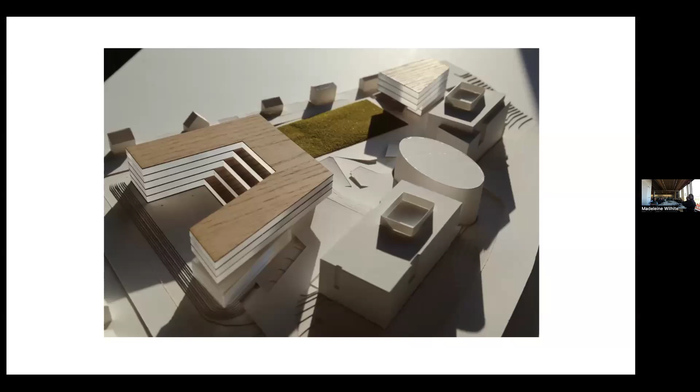At a high level, one of the fundamental goals was to reimagine how you enter the campus. For those who visited the Adidas store when it was located here, it was essentially a parking lot—you'd come in and there was a mismatch with a roundabout that was a dead end. They wanted to say, this is a global brand, and the experience of the campus should equate with the prominence of the company.

Just some history: there was a competition where they pre-selected about 6 firms, and we did a very quick model that went off to Germany and never came back—it broke into a million pieces.

It's interesting to see the initial ideas that really formed the building. We broke the program apart—for an office building we had this central pitch which we reconfigured, and then another idea of a cafe and a performance zone, which is a state-of-the-art gym. This wasn't necessarily totally in the brief, but we had food, service, and cafes in both areas that were a little different, with a landscape connecting it all.

One key thing was making sure the building reflected the ethos of the organization. Adidas has been involved with the Ocean Plastics Parley project, taking fishing nets and plastics from the ocean and using them in their footwear. The turf field outside has hundreds of thousands of recycled bottles in it. We wanted the building to reflect that engagement with sustainability relative to clothing and shoe production. Adidas as a brand also has a legacy of reinventing historic shoes with different materials and subtle variations, which we wanted to explore too.

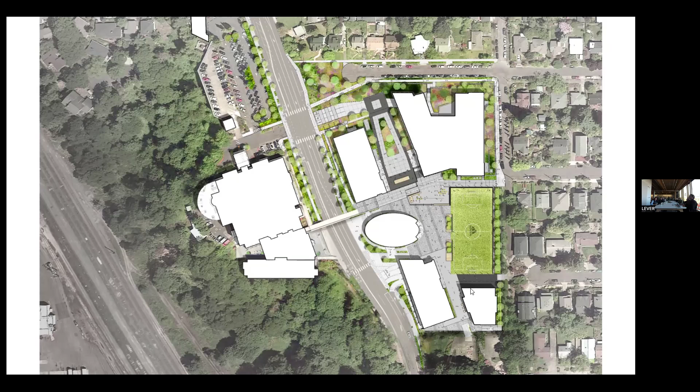And then this new plaza, the heart of the campus with the pitch, as they say in Britain, and then the back end here of the performance zone, which was originally tennis courts sitting on top of the existing parking garage. But the idea of sport being central was a key part of it, with this central plaza also being a place where people would work.

These show how the landscape navigates this somewhat unusual situation. I think this building was done by Bora in the 90s or something, and it was a renovation. Then we have single-story houses, and then our building. So it was quite a thing to thread all these elements around.

So this is some of the landscape components, in the sense of the connection of the interior to the outside, and the landscape becomes a major element within the project because we're trying to soften the edge as it comes to the neighborhood. And this is where the buses come up now, so it's a whole new entry sequence into the building.

So GGN really worked on this, creating this really beautiful buffer zone with these buildings, which are quite large, but we think actually strengthens the urban character of the landscape and the connection to it. So you can see here the building in the distance.

So I'm starting to talk a little bit about the gold building, which is the larger of the two. You can see here, this was an existing parking garage that is actually connected all the way to the major street that fronts the campus, and that's where you have access into this parking garage.

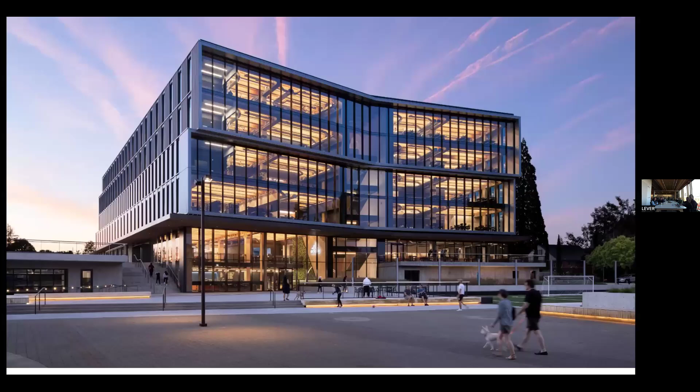Which is pretty fast, and one of the ways we did that was to look at prefabricating as many of the elements as possible, leveraging the fact that we're doing a parking garage, which will probably be concrete below grade, using prefabricated precast elements, and then extending that to create this hybrid building at the top. I'll show you in more detail how that works.

This gives you more of a sense, and Chris will talk about it in more detail, of this entry sequence where they would have whatever UCLA come up, unload the bus, and have this entry sequence. There's a bronze statue right there that you can see of Adi Dassler, the founder, so you can get your picture taken with that.

And then this is the sort of trick of this, it's still a very large parking garage, and it's also their loading dock. The idea was really to create a system that could work with a precast plank below grade with the parking, and then we created this perforated element above.

These are the early renderings of this original system that we worked in. I don't know, Chris, what did we work on? We worked on how many different schemes? There was a lot of schemes.

I was talking to somebody earlier about the all precast version. We mentioned it was a competition, but part of the competition team was an interiors firm out of the Bay Area named Place, but also Turner Construction. So we had this kind of hand in glove right from the get-go.

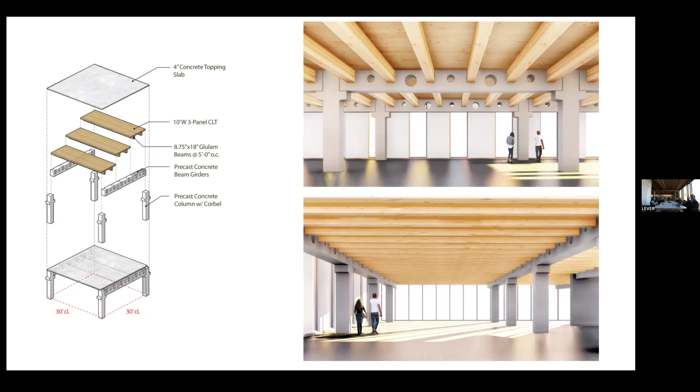So the drivers of the project, the kind of structure and prefabrication, could be studied both from a design perspective and planning out systems to keep them as efficient as possible, but also from real life pricing and schedule implications. The structure allowed us to reduce the project schedule by 3 months while keeping it cost neutral compared to a traditional PT structure.

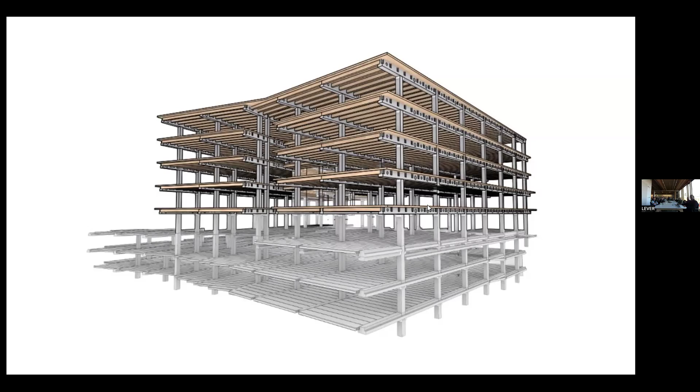Yeah, this shows it best. I think you can see this traditional PT, this is a beam-girder system. It doesn't have the retaining walls, but it shows how this traditional plank structure sort of transforms into something slightly different. But it's actually taking that grid all the way up, and this image really shows you how that was done.

I think there were about 1,000 precast pieces and about 550 planks or something like that. And then this is the really basic detail of the building blocks, the DNA of the building.

So this is basically a 3-ply panel, and they're all running in one direction, and then the glulams are prefabricated onto these and attached, and then there's a concrete topping slab. These diagonal screws you see here are also there for vibration, so they tie the CLT into the concrete slab that goes into the concrete cores.

And this is the more radical piece that I don't think had been done before, which is developing this perforated precast girder, and figuring out how we could do that. It was really done with everyone at the table.

Very early, we had to nail down the general approach, but then once we involve a precaster, we have their engineer at the table as well as our engineer. So there's that kind of tension in the mix, and our engineers would say you could put holes in this, bigger holes and more frequently, which obviously we're behind them pushing for.

But we also needed to be conscientious that by building up a thicker floor assembly with girders and beams, we weren't blowing the height of the building and ballooning our facade enclosure, finding these balances between the right size.

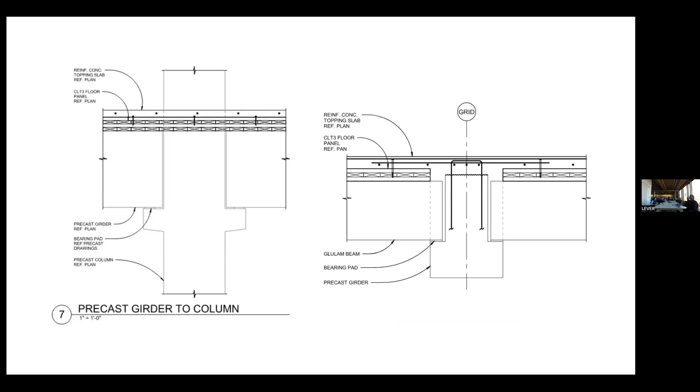So really early on, we had to map out systems, determine a kind of on-center spacing of duct distribution on the open office levels, and then sprinklers. And that kind of led to that perforated scheme.

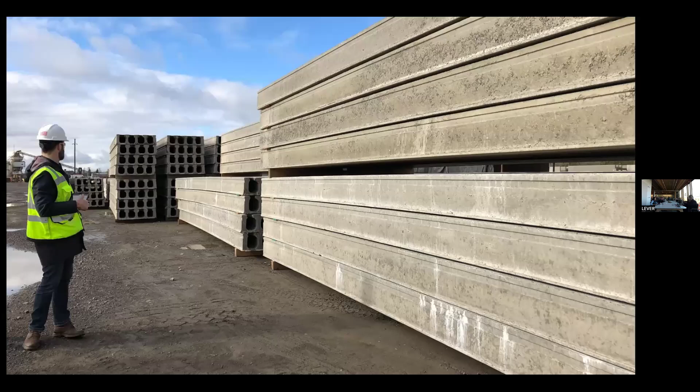And then refining typical precast elements - this is our visit to Knife River's yard. This is a plank, you can sort of see it, and you see how it has a lot of camber on these parking structures. That's something to be aware of if you're ever doing this again - we had a lot of camber. Parking garages don't really care about camber, but offices a little bit do.

So it's interesting, these sort of down and dirty details. This is the typical precast girder, and then the planks just sit on the sides, and the stirrups tie into the slab. So these details look really kind of dumb.

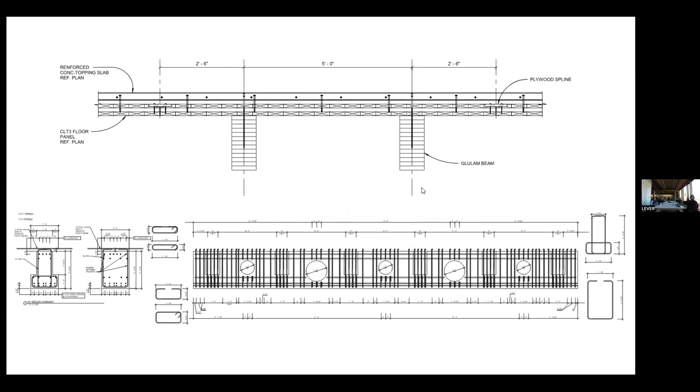They are, and that was sort of the intent - on this project, there's no machining of the timber. Most projects have lots of machining in everything you see, and this has nothing. Literally straight cuts, then glued on, and they're sitting on a Teflon plate, just sitting there by gravity, and they get tied into the stirrups and to the reinforced concrete topping slab.

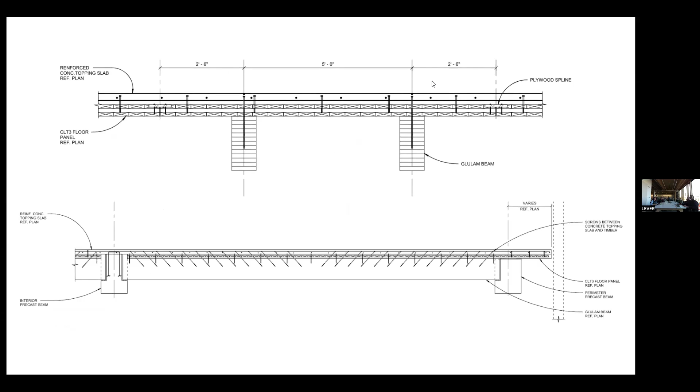So we took this kind of traditional inverted T and then started playing with it, getting some alignments from column to girder, and then the penetration, again pacing this out with our 5-foot on-center beam.

Aligning with an optimized 10-foot CLT panel, and the whole building kind of takes off from there.

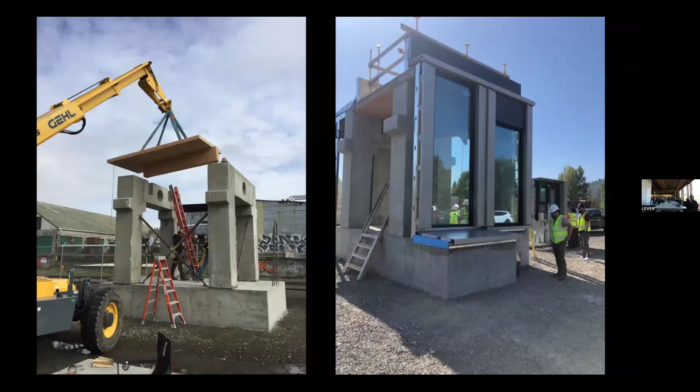One of the ways we were able to actually do this and really work with the contractor was we did this mini-me mock-up, and the client was really good to allow us and pay to do this - that's something we do a lot in our work. People ask why it's so resolved, and it's partially because we have this ability. We always try to engineer in this practice building. It's not so much a mock-up as it is getting all the trades that would actually do the work to work together on a smaller piece with all the key details in it. So it's not necessarily very attractive. Turner used that for a million things.

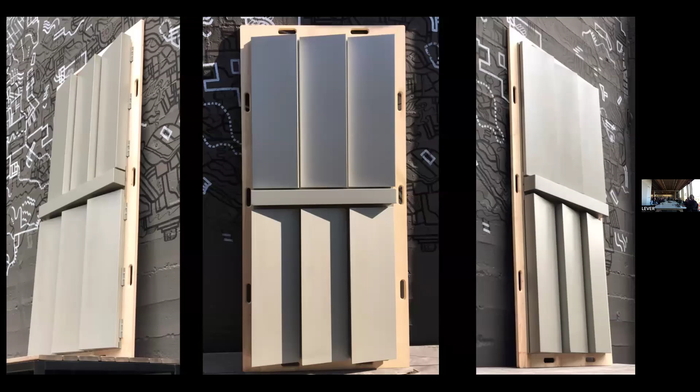They tested cleaning stains, because this sat out in a rusty yard in St. John's for probably too long. They brought the electrician out to test their conduit bends to determine how we were gonna get up out of the slab into walls. Then we used it for our facade mock-ups where we had Skyline do all the metal work, and Culver Glass do the curtain wall and glazing - generous mock-ups of the facade system.

One of the things about this project - we had a very fixed budget, so we really had to work with it. This is an interesting mock-up because the size of these panels, you can see here they're short, but close to the full height, not actually the full height, it's taller than that. We're optimizing the cutout of the ACM panel. So we just did this really simple 12-inch panel that gets folded back, but it's always the same panel, we're just flipping it.

What was for us, it's like the abrasion you do - if you look at a material and grade it, it looks flat in one way and a really different color in the other. So the building itself has that quality where this is all exactly the same color silver, but you get 6 different readings of it, just depending on how you're looking at the light. It's amazing because the building has this slight deflection, but in certain lights it looks completely flat, then it changes throughout the day.

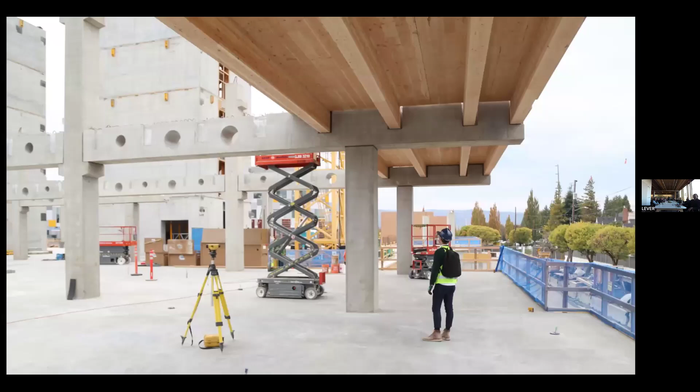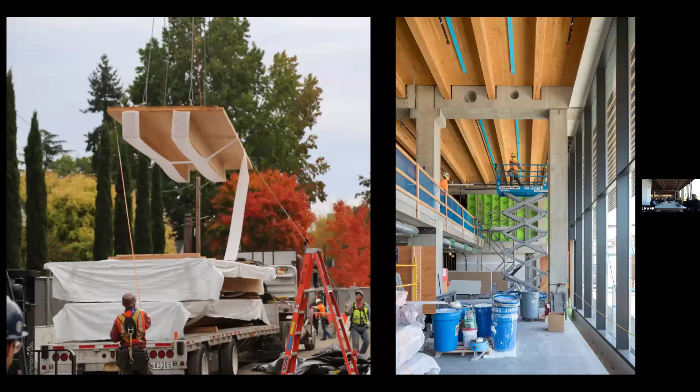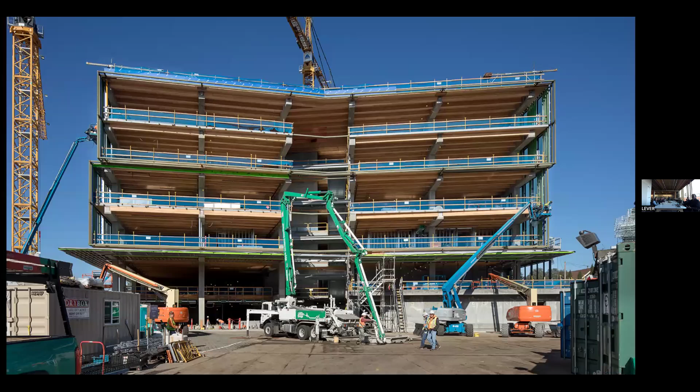So I think this was the first set of panels going in. The first 4, you could see them being lifted into place. They would come stacked 4 high on these trucks, then line up, and it was really elegant to see these panels going in place because literally, that was it. Presto, you had your building pretty much done. That first day we should have thrown a party.

Everybody who had been on this project for a couple of years at this point was so excited to see the stuff start arriving on site. Turner would joke that Thomas kept showing up uninvited to take photographs of things. It was just the real buzz of, oh my God, we're doing this. It was really nice.

And it was done so fast. Basically they built 180,000 square feet of building in 2 months, in the middle of winter, raining the whole time. Everything above that podium was done in literally 8 weeks. Super fast. They had the iron workers actually doing the erection for the timber, which was really great.

I think that's one of the things with these types of buildings, you can see these massive cantilevers coming out. This is a really nice image which we don't show. That translates into the actual office space. You can kind of see it, that's the entry. And then areas where, this is a good shot because it shows on one side we have 2 bays in the plan, and on one side we just have a main running down, and then it pops the mechanical up into the other cassettes that we have there.

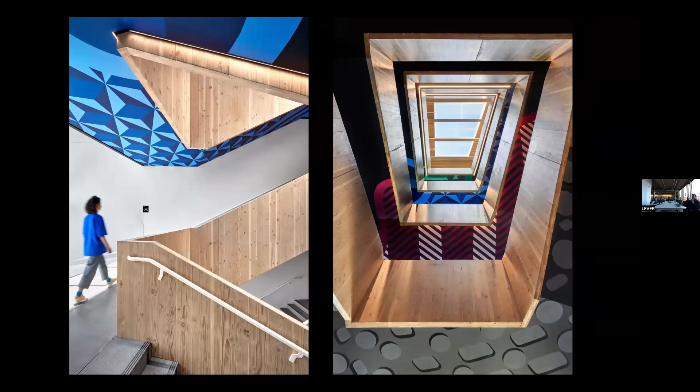This is probably one of the nicest fire stairs in Oregon. But I think one of the things we've found with this building and all the buildings we do, and this is partially due to the way the code's written in the United States, is even in a building this small you need 2 separate fire stairs. So at Adidas we sort of supersized that. There's only 2 fire stairs, and this is one of the primary ones, but it's also basically isolated, and has a skylight that goes all the way up.

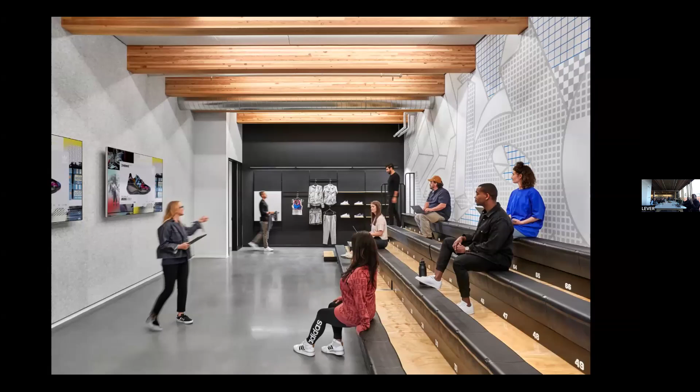So the idea is that maybe down the road they might rip all of the mechanical out and just have the structure, and do a completely different system for the mechanical. I think thinking about buildings as having multiple generations of use, and not being absolutely specialized or always just doing exactly what you need at the time.

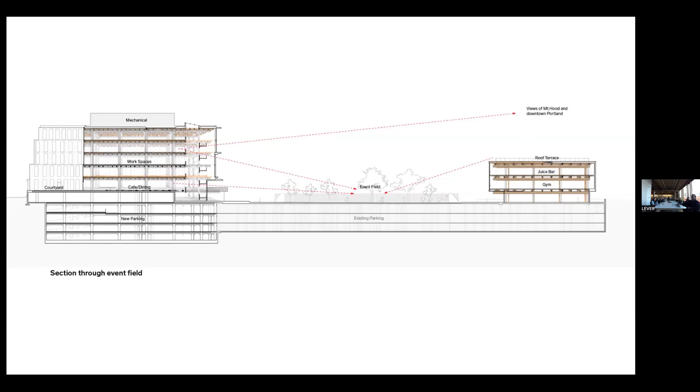This parking garage was really originally engineered to hold a 3-story building, but we were able to actually do technically a 4-story building because it's out of timber. So this project's completely timber. You can kind of see the plan here.

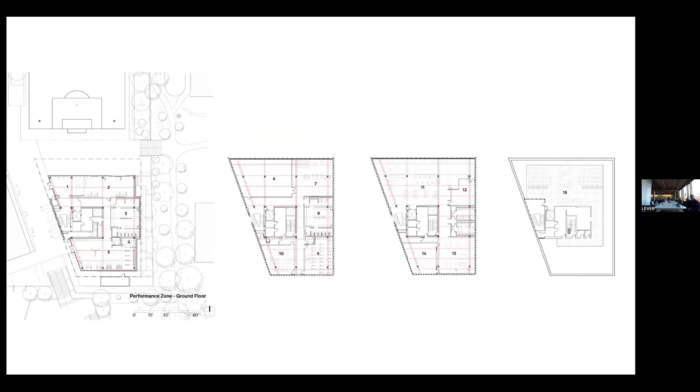That's why we have the double beams, which is typically what you need. And it's a different structure in that it's a BRB steel brace frame, which is in the center, and then the structure's tied to it.

One of the exciting things to see - this isn't how it was built, but it just illustrates all the different systems. I don't know, Chris, if there's anything you wanted to talk about with the way it was designed.

Yeah, the structure was originally designed to accommodate a three-story steel building, but we were able to do a little bit more with timber being lighter. There was some fine print - it's technically a 4-story building.

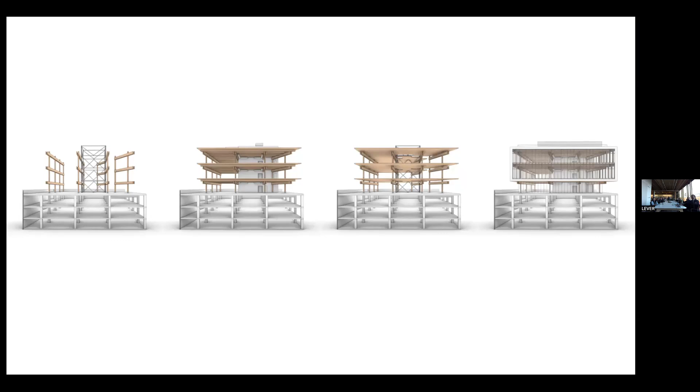The paired beam as well as the cantilevers that we see on the gold building create that central pitch, kind of stadium atmosphere where you can be at work and see your colleagues having a game in the middle of the day, reinforcing the central idea of Adidas, which is about sport.

One of the innovative kind of connectors on this project goes back to the theme of simplicity, because one of the things we've been really focused on as a firm is that all the projects we've done are sourced on the West Coast or in the region here.

That's been purposeful, because I used to work in Europe, and I know that Europeans can do all this stuff probably for less money and faster, because everything's so much more advanced - they have the robots already in place. We're building some new mills that'll probably be as sophisticated.

So one of our goals was to create the simplest amount of machining so we could be competitive, because literally there was no machining. On this piece, the only major machining is they had to drill a hole through the column and then epoxy this big piece of steel in the middle of it, and then route out the same thing in these big beams. That was it - that's all the machining on the whole.

On the other project, there was nothing except cutting the CLT, which you could just do with a saw. And this one was that too. The reasoning for that was that it allowed us to actually bury the joint in with the wood - this just had to be a rated structure.

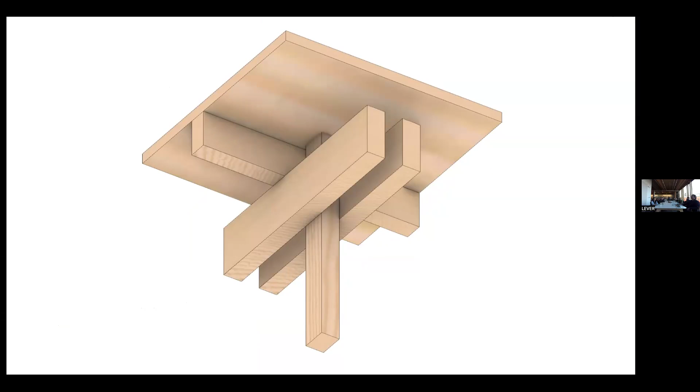It's not structural - essentially it's just because we have a bunch of people jogging on running machines or whatever above. That was a little bit of, probably in hindsight, not a good idea to have a big cantilever on a gym.

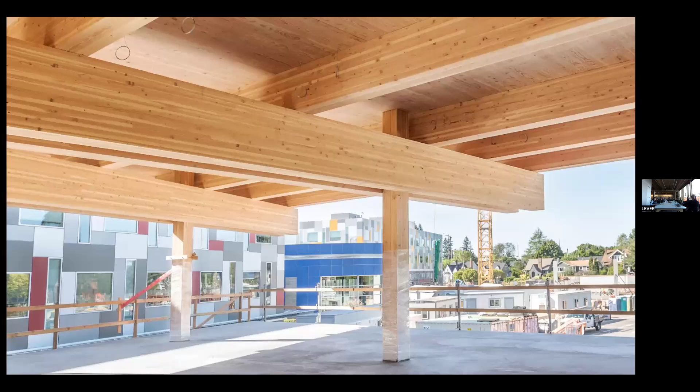But it happens. So this gives you a good sense of the columns that go through, and then just these beams that are sitting on top, basically gravity loaded and just held in place. Once it's loaded up, they're sitting there.

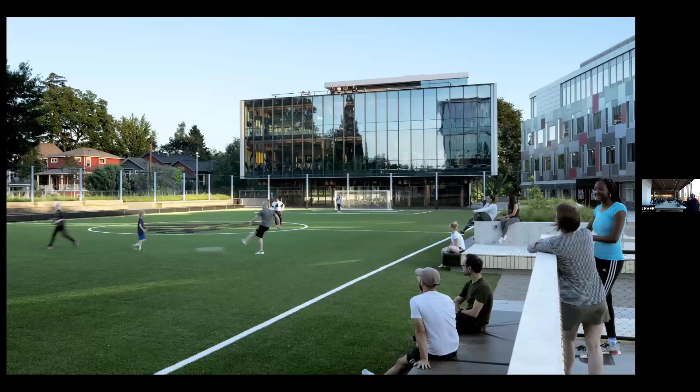It's another shot to give you a sense of the structure, the big panels - similar to the gold building, and what we try to do with most of our timber jobs is think about systems well in advance. Another reason for the stacking method is you create primary and secondary distribution pathways for mechanical - you'll see in the finished photos, mains will sidle up to the paired beam and then pop up with a clear run the other direction in the building.

You can see that here, and it moves the mains up and out of the sight line a little bit. You can sort of see that in this image here where you're looking closely.

So we have these mains that run back to the core, and we're doing something similar, and then it just pops up over the beam and runs the whole length of the space. I think that's something critical in doing these timber buildings—really thinking about the mechanical runs and working more closely with the mechanical engineers than they'd actually like.

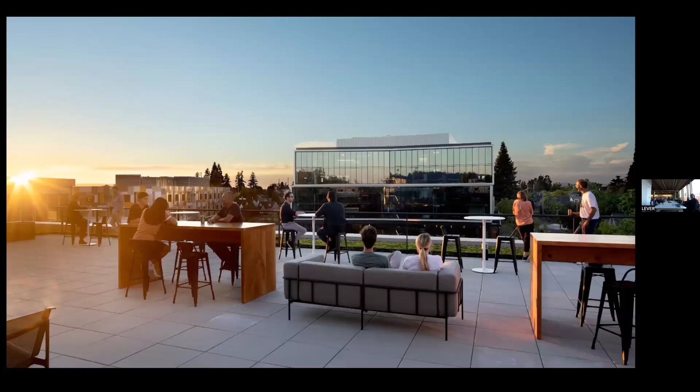So that's the juice bar on the roof deck—another view of activating the space. It's amazing when you get up here, the views; you can see Mount St. Helens in the distance and the buildings. Both these buildings have full solar, and both are LEED gold.

It's interesting because we did a carbon analysis at the University of Toronto architecture school, and got incredibly good ratings, even with the concrete structure, because we were coming from so close, both in terms of the precast and the timber. All told, it was 2.4 million board feet of lumber—that's a lot of carbon sequestration, a lot of wood.

So this is just the gym area coming into it. This was branded by O+6 Studio. One of the ideas here is like an outdoor sports court—all rubber flooring, so we designed this cantilever structure so they can exercise outside.

You can kind of see some of the screws they use to pull the beam onto that, bearing on these structural screws—I'll show you another view up there. You can see these holes here, those are just bored in, and then they take a long screw and screw it up so it's sitting on top of that dado element taken out of the wood, so the steel is bearing on screws as additional reinforcement.

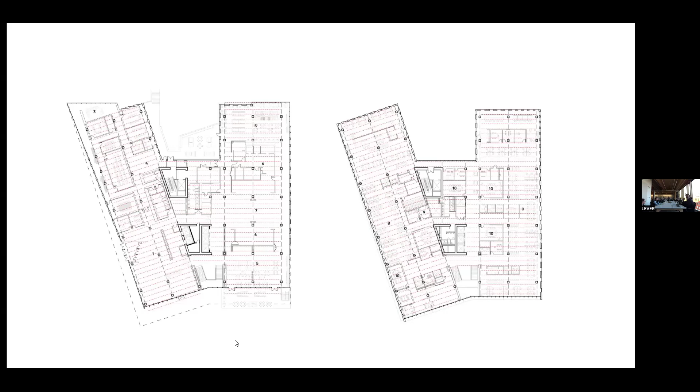Yes, and was that gold building, facing the soccer field, facing south? Any issues with that? Yeah, like glazing. So yes to rooftop solar, maximizing as much as possible with the solar studies that were done.

Given we have mechanical up there and the natural shading that can occur, interestingly we also layered green roof over or under solar, so we did both.

And then yes, south-facing glazing, part of the vision of that stadium effect of looking down on the pitch led us to a lot of glazing on the south end, which you can see in this image. Pairing the additional solar load with the cantilever, which forced us to drop some of those penetrations, drove the mechanical solutions at that end to be a little bit more onerous.

One of the reasons we added this deep cantilever was that it basically shades all this glazing. We actually calculated the shading on this, and all these have 12-inch fins on them, so as the sun comes around it blocks some of the light. It's a custom mullion cap.

This is where the field happens to face south. We felt like, okay, we're going to do punched openings everywhere else, but in a way south is the easiest — with some cantilever it actually reduces quite a bit, shades the building quite a bit. It was surprising to us that even just 3 or 4 feet there makes a big difference in terms of the solar gain.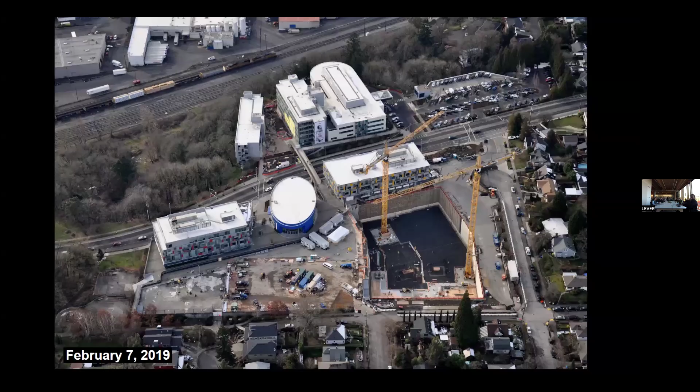We worked really hand in hand with Opalese Studio—they did the branding and the interior work. They were looking to do something a little different than what they'd had previously in other places, something more welcoming. They had to deal with a new concept they were rolling out for how officing was going to work, and hoteling.

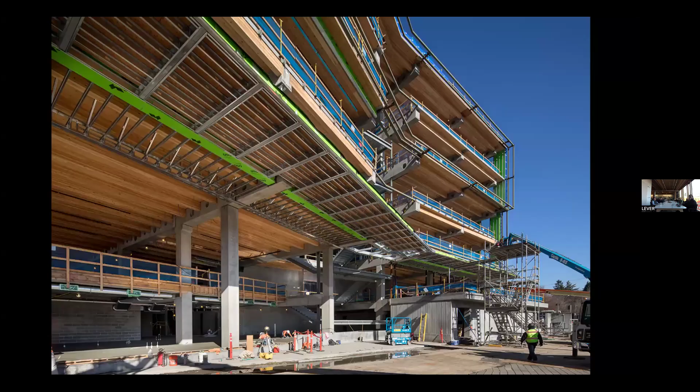There was this whole concept of nobody having a desk—everybody shows up and can squat, which is why you see all these storage units. There's a whole underlayer of systems enabled to allow them to use the building like they were using their new buildings in Germany.

I don't think it was really an issue—also, we were doing the whole thing during COVID, so the whole project was built right as COVID started. There was a weird pause and then a reopening, and the last piece of construction was during COVID, so it was all sort of online at a certain point.

Did y'all have conversations about the workplace during that time, where everything was totally changing, and then kind of went back? Not really, because it was all sort of already baked by that time.

At one time we had operable windows everywhere, and they were engineered—taken out of the project as a maintenance headache. I'm sure people would have enjoyed having the windows be more open, or having more space that was accessible.